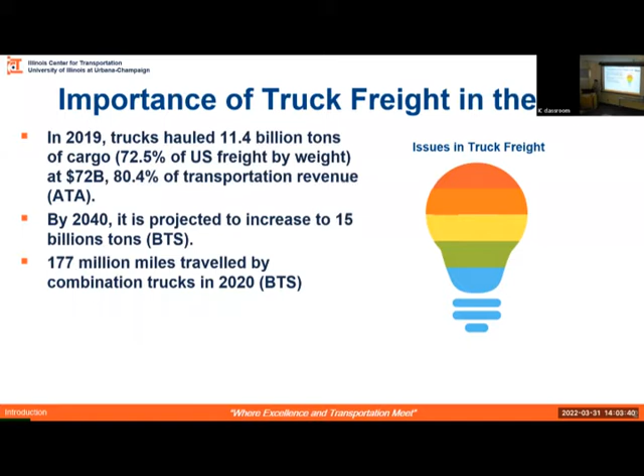Since it is so crucial, even the smallest problems can be huge. The things I want to talk about are these 5 things. First, there is a driver shortage of currently over 60,000 people, and this is expected to get even higher with time.

Second, the cost per ton of freight is really high—approximately 3 times compared to rail. So that's really huge. Third is safety. Trucks make up only 5% of the vehicle population, but they are responsible for 10% of all the fatalities, so that's something we have to work on.

About congestion, in 2019 alone, in a 50 mile segment, there was a congestion cost of $300 million. And finally, the 5% of the vehicle population consumes 24% of the fuel, and we are responsible for almost 1/3 of all emissions in the US. It's something we have to look at.

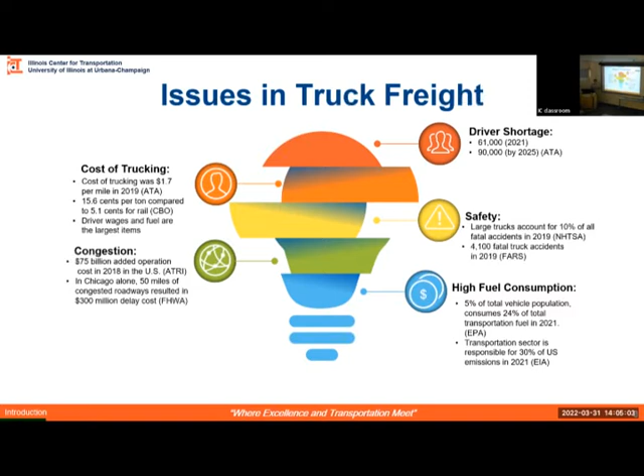At this point, I would like to introduce connected and autonomous platooning. What ends up happening is these trucks follow each other very closely, right behind each other. With that, they save approximately 5 to 15% fuel, because of their control strategies—they can be really close and follow each other right behind the same line.

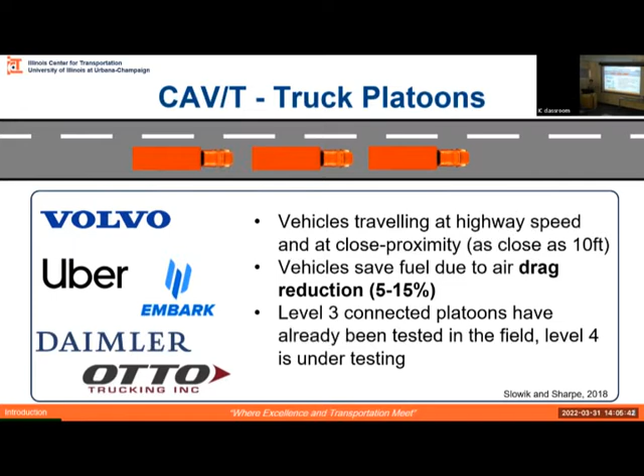The hope is that when we introduce platoons, we are going to reduce some of these problems. First, the driver shortage—you need just one driver per platoon in the first stage, and then you could even take that away. It was calculated this could reduce costs by up to 45%. And because platoons occupy less space on the lane, they increase traffic capacity. We hope they also increase safety, and finally, as mentioned, they save between 5 to 15% fuel. So it's looking good so far.

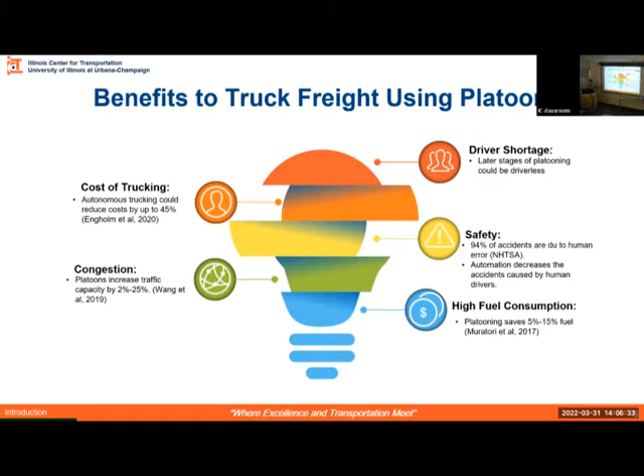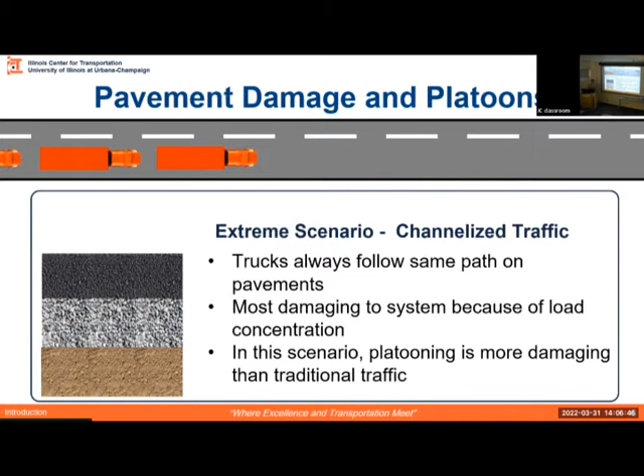But the one thing that we have not talked about is how these platoons are going to interact with our pavements, because that's where they're going to be, right? If you think about it, the reason why they save so much fuel is because they're really good at following each other in the same line.

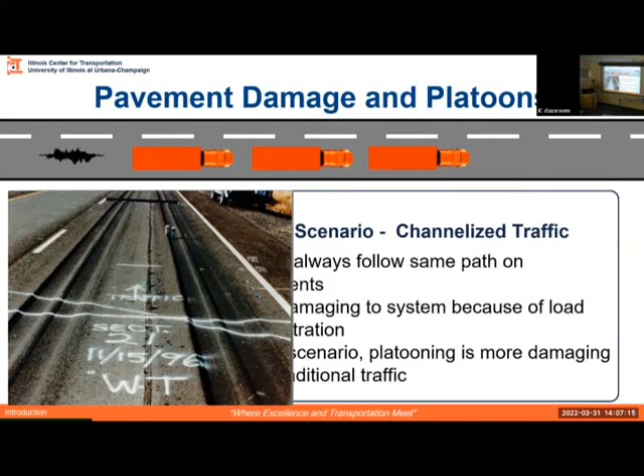And you may think, hey, this is a test section, it's impossible for this to happen in the field. Here's a picture we got from the field. You can see the same thing in small lanes — this is actually a thing.

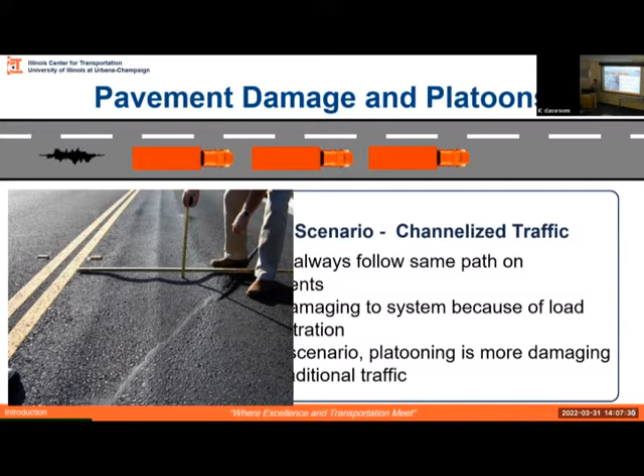So we have to think about how we can solve this problem when we get into platooning. One possible solution is to shift these trucks left and right a bit, so that over time we're not loading the same point. This will both save fuel and hopefully preserve the pavement condition.

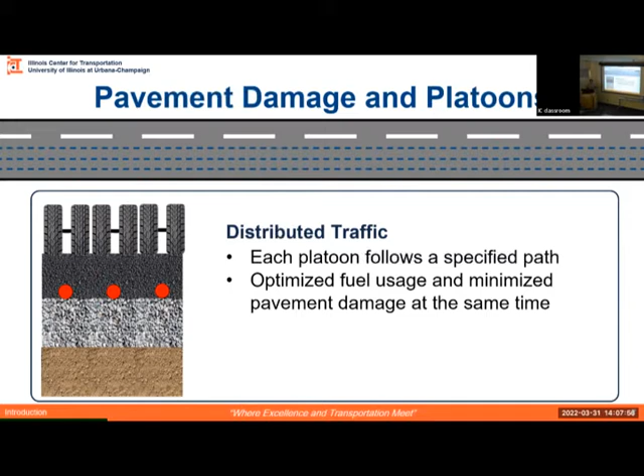So we need a model that can describe this sort of behavior. Here are the four things, the four questions that we're going to talk about today.

To know how platoons interact with the pavement, first we must know where can I platoon to begin with. What percentage, what segments of this highway can I actually do platooning on?

Two, how will this spacing change the responses and how the pavement is responding to the loading? And third, how will this position, where they are in the lane, change our pavement design?

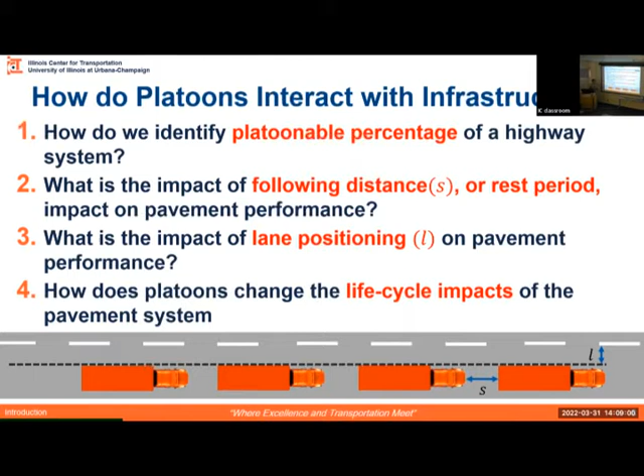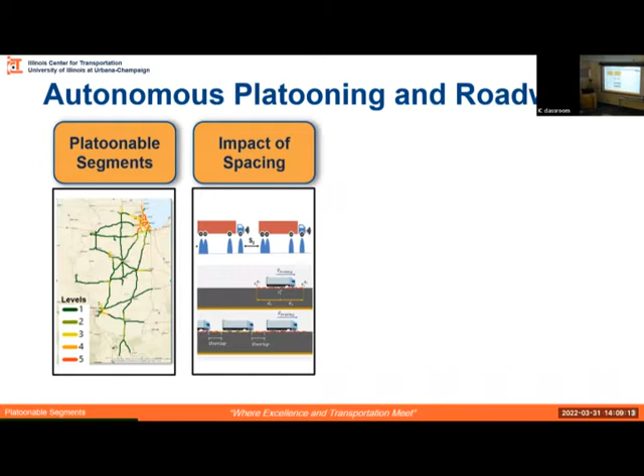And finally, when we look at this in a whole life cycle perspective, is it actually reasonable for us to expect that platooning is good, or should we do something else? So these are the four questions we'll cover in the remaining half hour: platoonable segments, the impact of spacing, the impact of lane position, and finally the life cycle.

Starting with the platoonable segments — when you think about platooning, we have to think about what makes platooning save fuel. The thing is, these trucks need to travel at free flow speed for more than 15 to 20 minutes for this to be feasible.

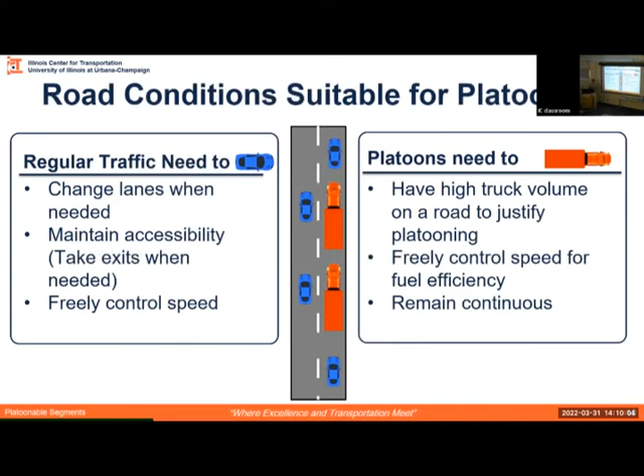If you have a lot of traffic and you have to stop and start, then it's not going to be fuel efficient. But you also have to care about the rest of the traffic, because if you have a very long platoon and you want to take an exit, you don't want to fight with the platoon to take an exit, which can cause a lot of problems.

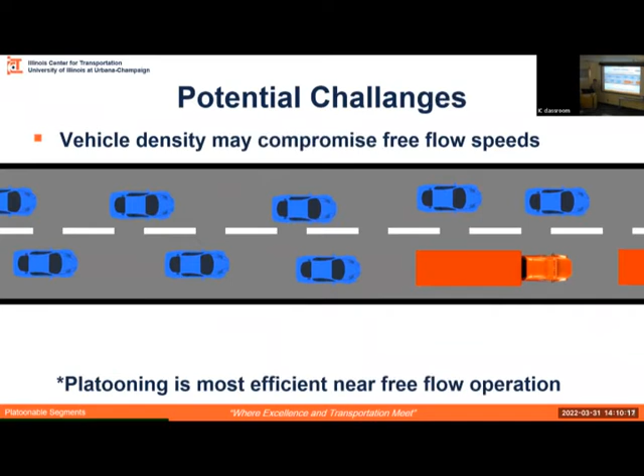So here are the two challenges I just mentioned. The first is vehicle density — if we have very high density, then I don't have control over my speed, so I cannot platoon.

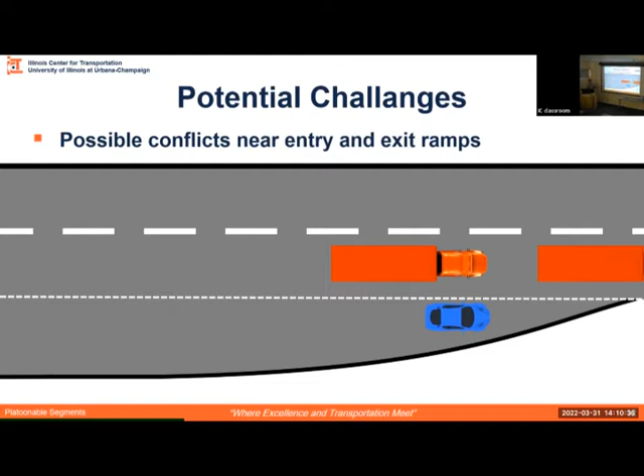Two, we don't want a situation that looks something like this, where a vehicle that wants to come into the roadway or get out of the roadway gets stopped by a platoon. With these two things in mind, we looked at the whole road network of the state.

And for every 20-mile segment, we looked at two things: one, what is the volume over capacity of the roadway, and two, how many possible conflicts will there be within these 20 miles?

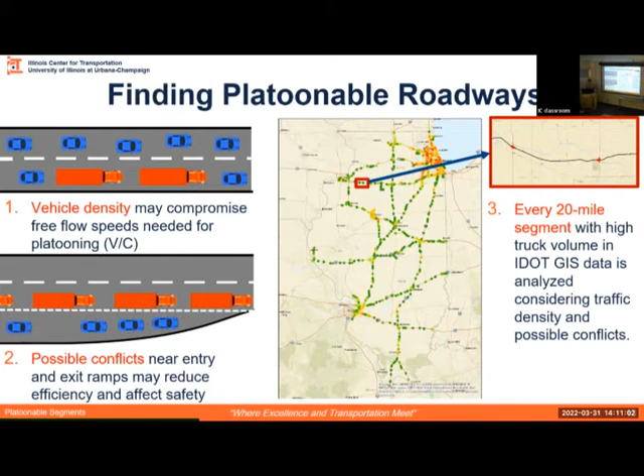Then what we did is say, if it's level of service C or below, where you have control over your speed, then you can platoon. Similarly, if you're expecting less than 4 interactions between vehicles, then you can platoon. If you have higher, then you cannot platoon.

So with this, you can see, for example, with 5 trucks and 65 feet of spacing, the majority of the network is platoonable, except for Chicago, some red zones in Peoria, and a bit in Champaign.

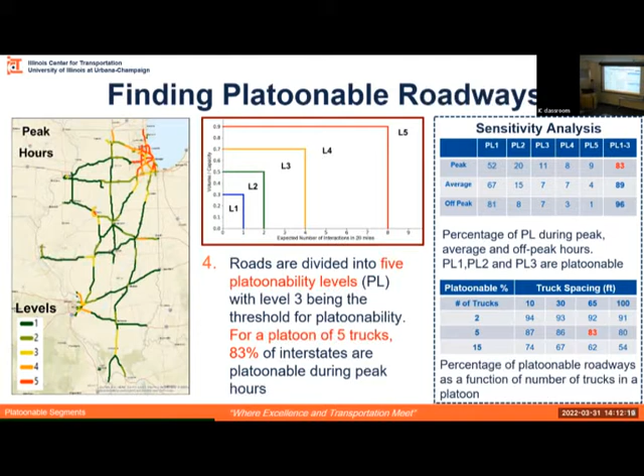If you have only 2 trucks, of course you're going to be disrupting traffic less, so a greater percentage of the roadway will be platoonable. So that was the platoonable segment analysis.

So now that we know what percentage is platoonable, how do we actually change our design of the pavement to interact with the platoons? The first thing we're going to look at is the impact of spacing.

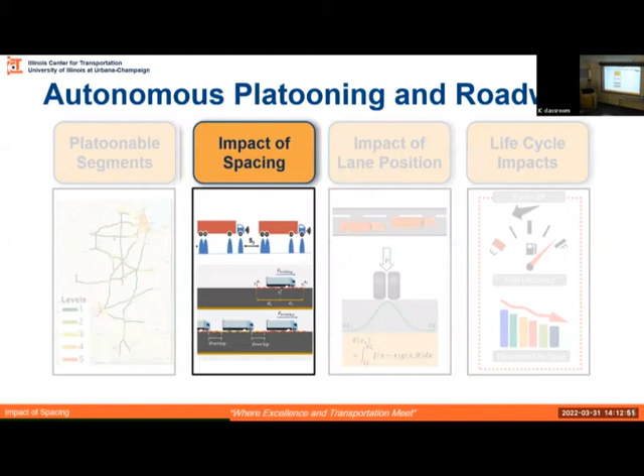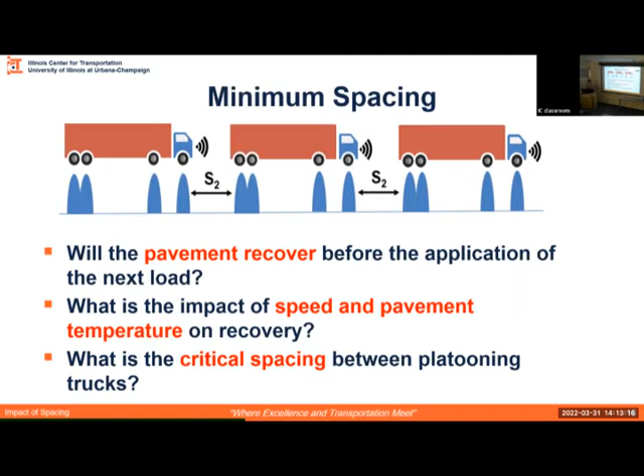Because we're talking about flexible pavements, and it's a viscoelastic material, we care about the time it takes for this material to recover once it's been loaded. The fear is that if we put trucks too closely together, we will load the pavement before it fully recovers, and thus we will have cracking and rutting faster.

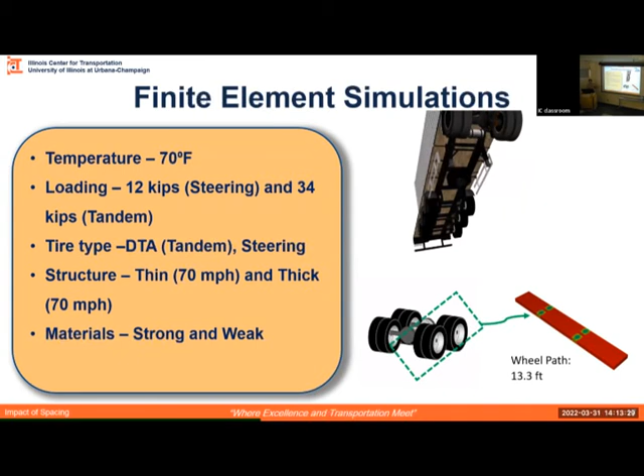So what we did to look at that was run some finite element simulations, and we took these modeled tires and rolled them onto the pavement. Here is a quick video that shows what that looks like over time.

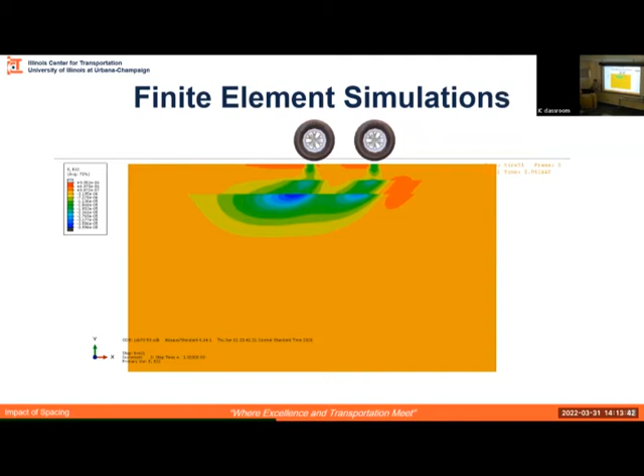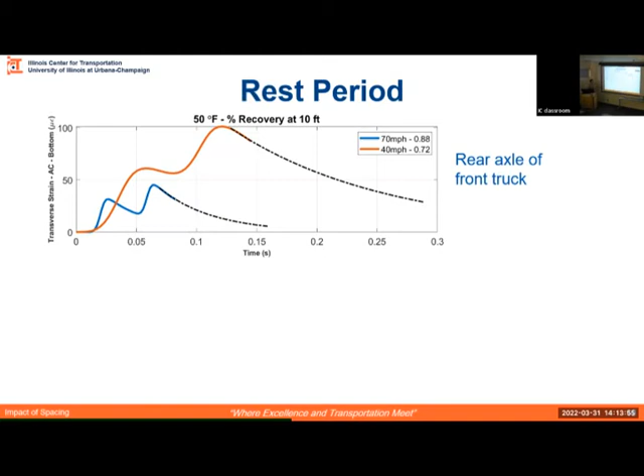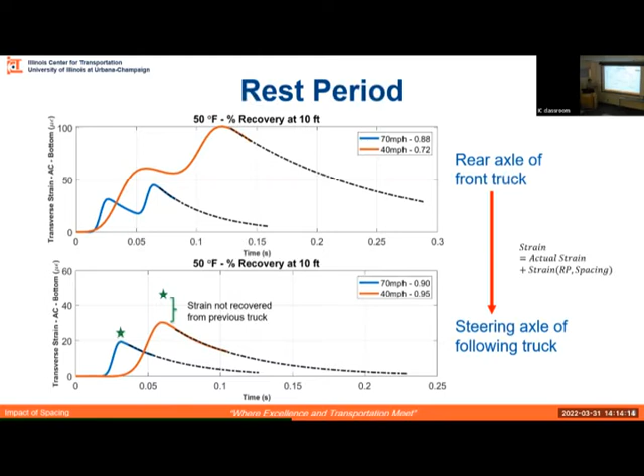So what we want to look at: once the first truck passes, the response, the stresses and the strains, will recover a certain amount. Then if you bring in another load, you will have this loading profile. Depending on where you are on this path, you will potentially increase your responses, and if this happens, it might be the case that you're going to have faster failing of your pavement.

But I have to put a star here, because we have to realize that this is a finite element simulation. And at the end, what we're interested in is the stresses.

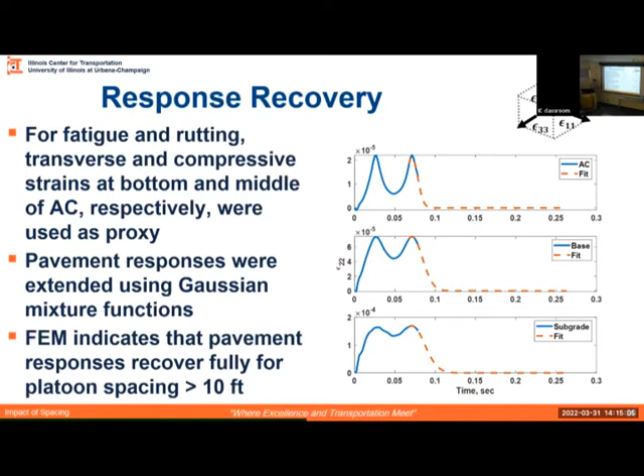So we are currently doing some tests on permanent deformations, and you can see, well this is not a final result, but we saw that as you increase the rest period, you actually increase your permanent deformation, which does not make a lot of sense when you first look at it, but I'm happy to talk about this later.

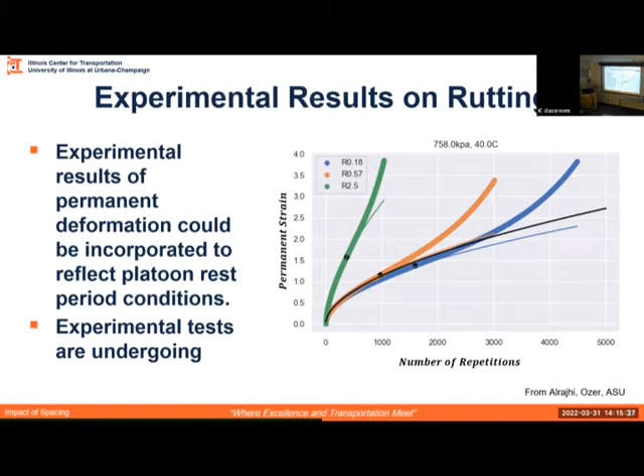Within the scope of what we did for the finite element, we did not see this result, but we're still working on it. So now that we dealt with spacing, and we said it doesn't have an impact according to the finite element simulations, we have to look at the impact of lane position now.

I want to take a quick detour for those who don't know how we design pavements, because I think this will help put things into perspective. The majority of roadways here in the US are flexible, and this is a typical structure: a flexible layer, a base, and a subgrade.

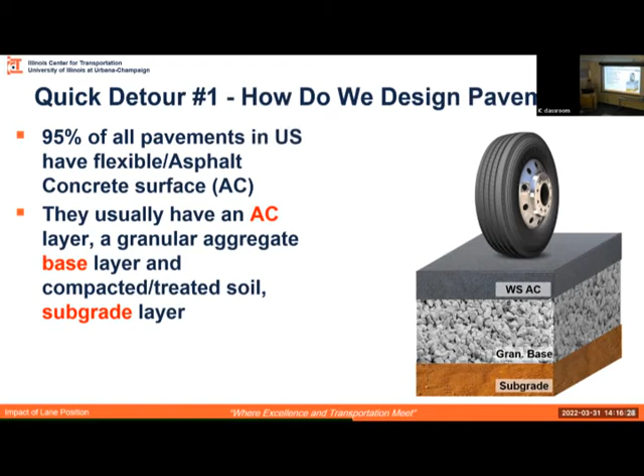So what you may want to do when designing your pavement is think about the most common load you will have. In the US, for example, this can be a class 9 truck. Then you take the most common loading on that truck, and put that into your favorite simulation software. It can be finite element, or something else.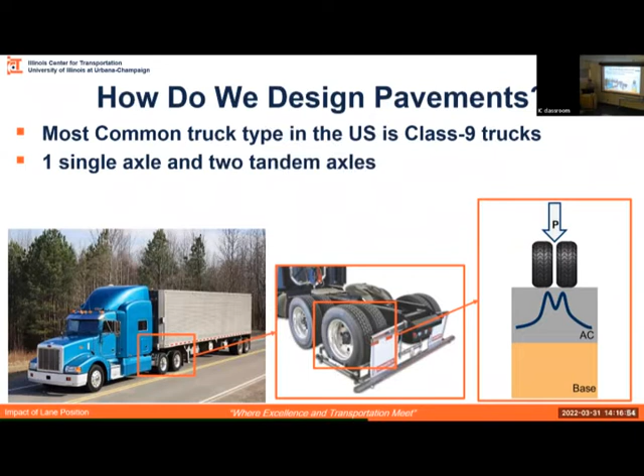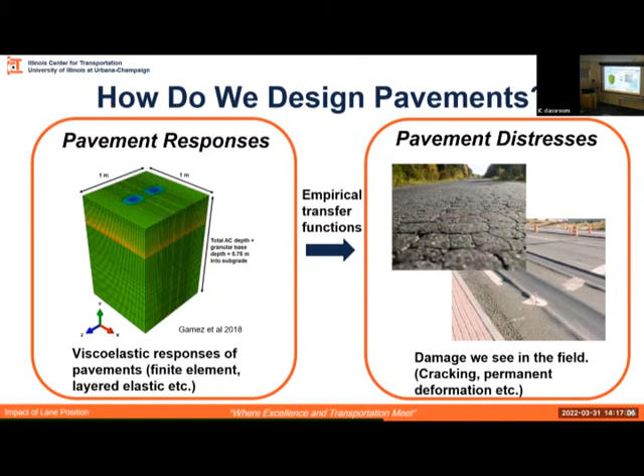Once you have that, you have the responses of the pavement, which are the stresses and the strains. Then you connect those to the distresses we see in the field, which are mainly the load-related ones: cracking and rutting. This whole thing is called the mechanistic empirical pavement design.

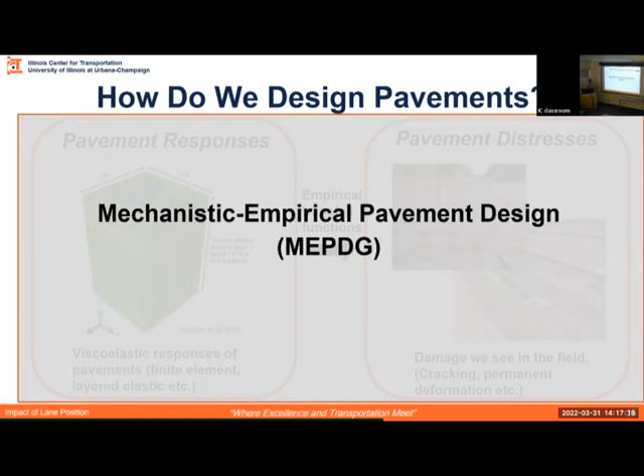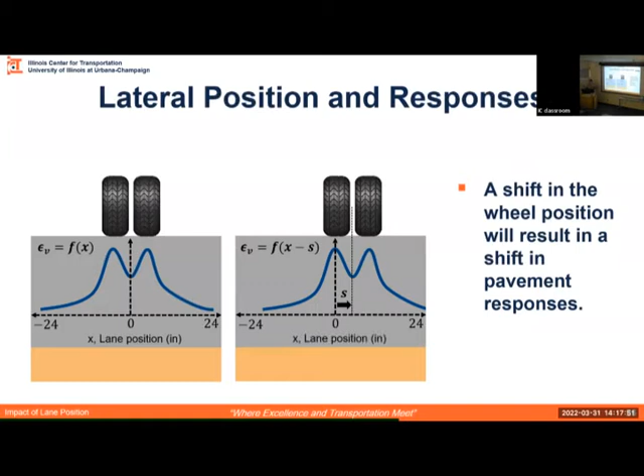So where do we put the impact of spacing in this whole frame? When you think about it, the point where it comes into place is that when you shift the tire, you're also shifting this response. So if you can find a model for this shift, or know how that shift is happening with respect to time, you will have an idea of how this response profile will look like in, say, 10 or 15 years.

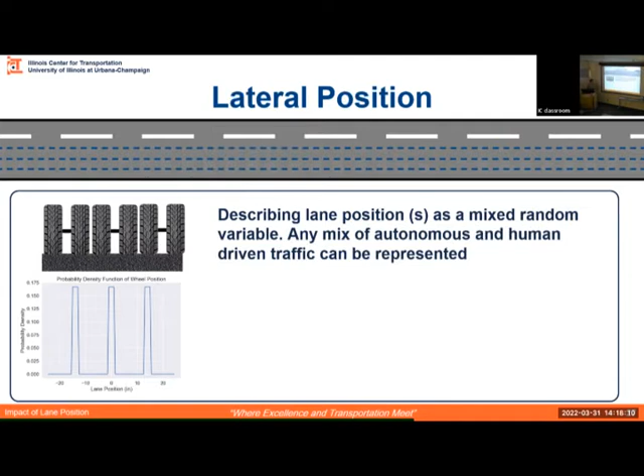So how do we do that? If we have a case like this, where we have trucks that are really good at keeping their position, then we can say they sort of follow a uniform distribution with these three peaks. But then there is you and me, humans, who are on this roadway too, and we follow somewhat a normal distribution, which is what's shown in the literature.

And then what you have to do is put these two together, which will give you, for any mixture of traffic, how the lane position will look like.

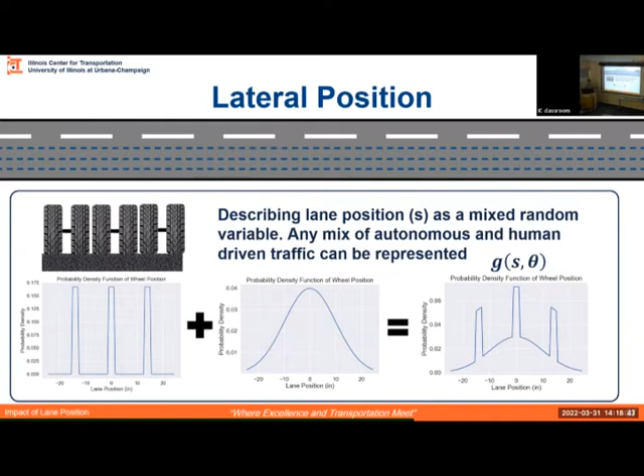And if you want to see the future, let's say 10 or 15 years, you can just compute the mean of this response profile that is subjected to this loading. Now, I know that was a little bit hand-wavy, so let me show you a quick example here.

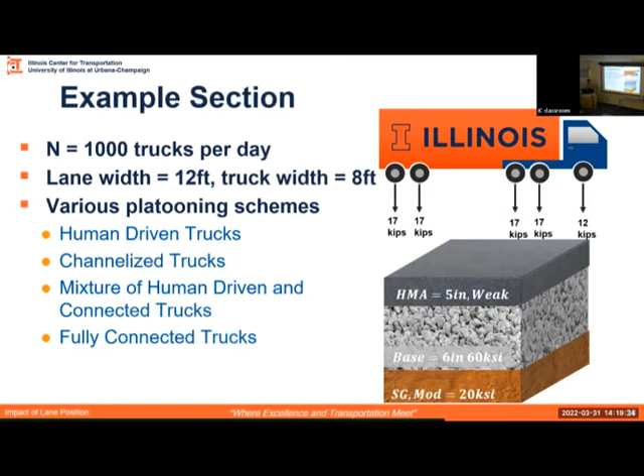So we have a pavement here that is 5 inches with a 6-inch base and a subgrade of 20 KSI. And we're going to load it with this truck loading, 1,000 per day. The 4 traffic schemes we're going to look at are human, channelized, mixed, and fully connected. Here's what that looks like.

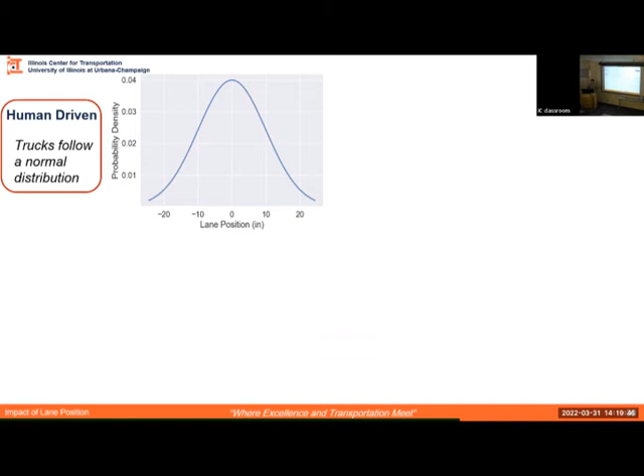Stay with me. This is what the human looks like - we're in the middle, but we're not perfect. This is what the channelized will look like - they're always in the middle. Here's a mix of 40% connectivity, where we put 20% on the left side of the lane and 20% on the right side of the lane. Then 100%, in which we distribute it like this.

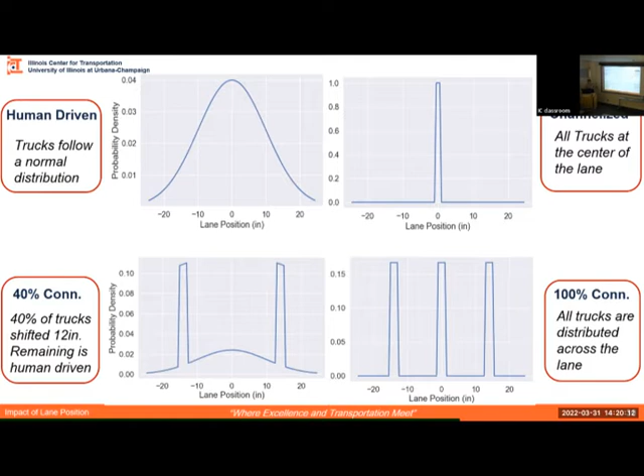So now we want to see what happens in the pavement when we put these loadings on top of it. If we look at the results for a span of 10 years, let's start with permanent deformation. We have a baseline for the human. As you might expect, if I impose a channelized loading, I'm going to have a lot higher rutting. But if I shift some of the traffic to the left and right with a mixed regime, I can reduce this significantly.

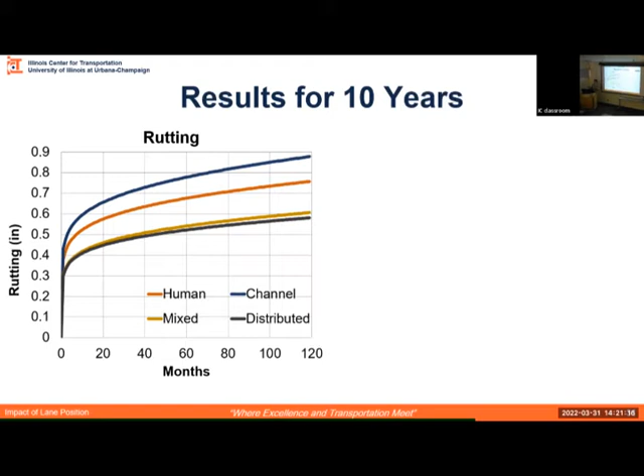Now, I can do some further reduction if I distribute the rest, but we saw in these studies that it's a case of diminishing returns. The first 20-30% that you shift really helps, but the rest, it still helps, but if you can shift that first 20-30%, you get a lot of the returns to begin with.

Same thing with the cracking. We have a baseline for human, which channelized is worse. Mixed is of course better because we shifted it. And then we get a little bit more returns, but again, it's not as much as we had in the previous case.

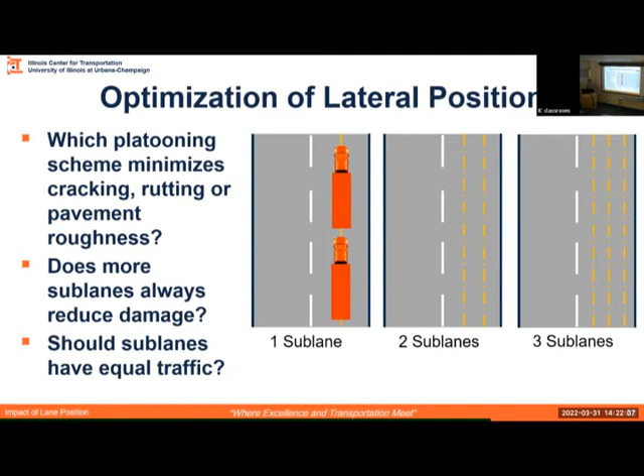So the question you might be thinking about right now is, is there a scheme that will actually make this as low as possible? That was the question we looked at, and we considered a different amount of sublanes, and placed these vehicles at these different locations with a genetic algorithm to see which one will give the lowest pavement damage.

This is an example of a scheme that gives the lowest. But just to put it into perspective, the results of this are incredibly close to the one where we had one on the left, one in the middle, and one on the right. Because think about how wide a truck tire is - shifting this by half an inch is not going to really change your results.

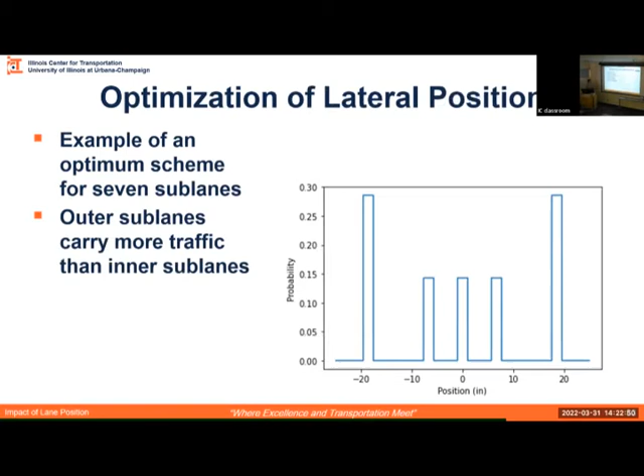You have to shift it by a foot for you to see something that actually makes sense. So that's why you're seeing the impact of these diminishing returns, if that makes sense. So now we have that.

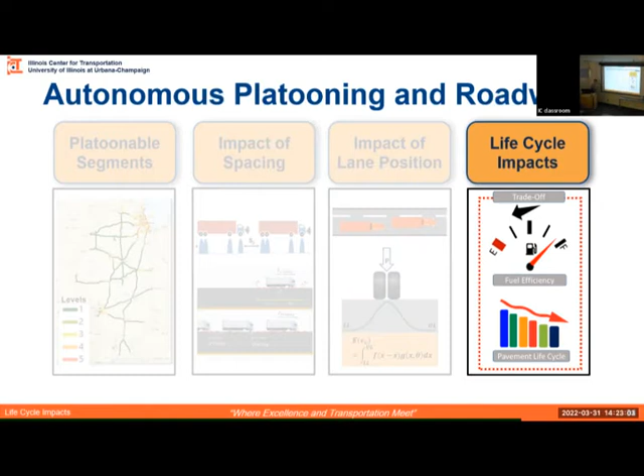Let's finally look at how this all changes the overall life cycle of this pavement. I want to take a quick detour to tell you what we mean by life cycle. When we talk about sustainability in general, we're talking about these 3 pillars. For this project, we only focus on the first 2, but that's not to say the social part isn't important - it's just what we focus on within the scope of this project.

When we talk about the life cycle, we're really talking about the point at which you have the material, your rocks and your binder, and how you're going to get them into the field. How are you going to get them into the plant? All the way up to when you're done, how you're going to reuse or recycle your material.

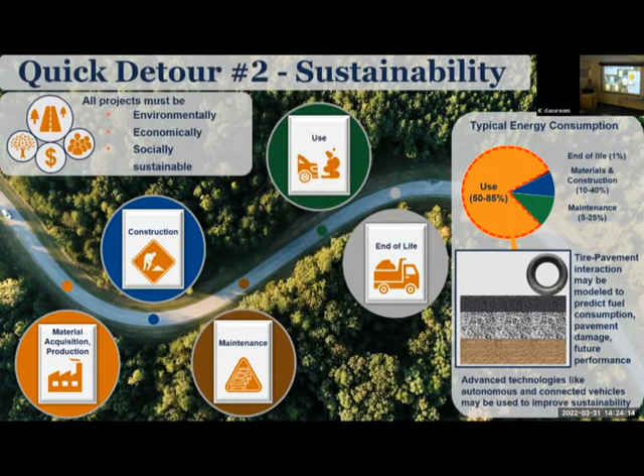So if you look at a typical life of a pavement, you see that the majority comes from the use stage, where vehicles are interacting with the pavement to consume fuel. The rougher your pavement surface is, the more fuel you're going to consume. So that's something we have to keep in mind. With this picture in mind, we did a life cycle assessment and life cycle cost for these 4 pavements.

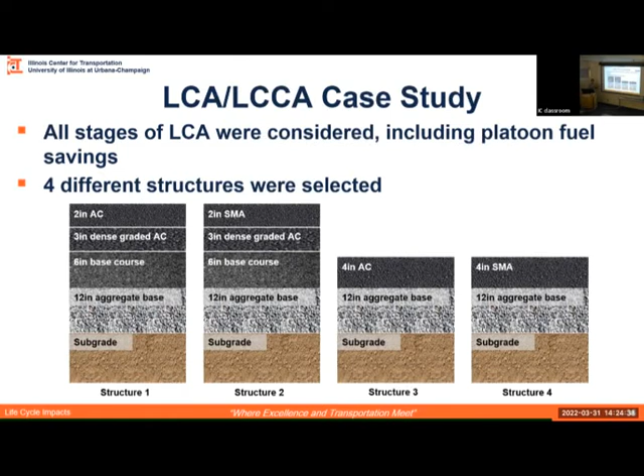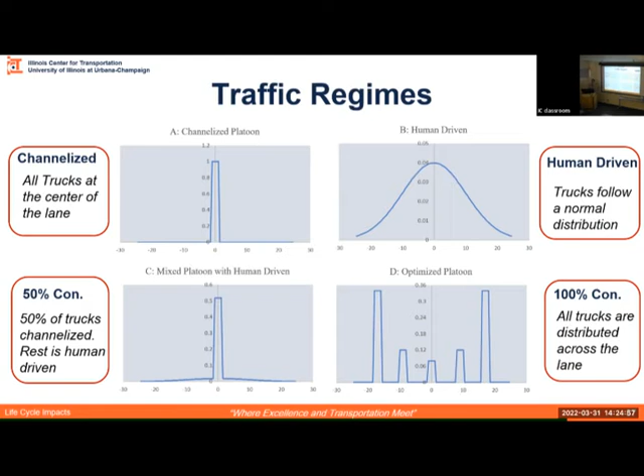For time's sake, I'm just going to show you the results of this one, but it pretty much follows the same thing. Here are the 4 traffic regimes that we're going to compare over a span of 40 years: we have the channelized, the human, a mixture of channelized and human, and one where we distributed the traffic.

So if we look at the life of this over a 40-year life, and assume we do regular maintenance at 10, 20, 30, and 40 years, we can look at the impact of these costs. The agency cost is the cost that goes into building the roadway, and because we're doing maintenance at regular intervals, you'd expect this to be constant. This is just for this scenario, by the way. We have some others, but for time's sake I'm just going to show you these results.

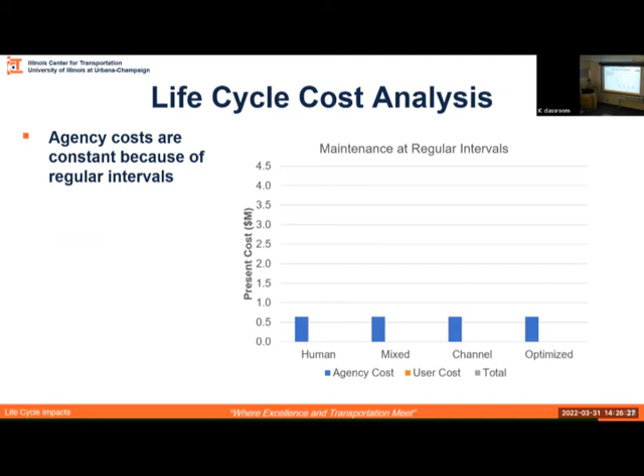Now, what do you think will happen to the user cost when we put that on top of this? As you might expect, we have a benchmark for human. When we platoon, when we are channelized, we are still saving a lot of fuel because we are platooning, and then the mixture is somewhere in the middle. But if you actually distribute the traffic to the left and right, you are saving fuel by platooning, and also because the pavement surface is a lot less rough, you consume less fuel on the same pavement. So it's a really win-win-win situation—you're not losing anything in this scenario. There's no reason why you should have channelized if this has the same savings and then more.

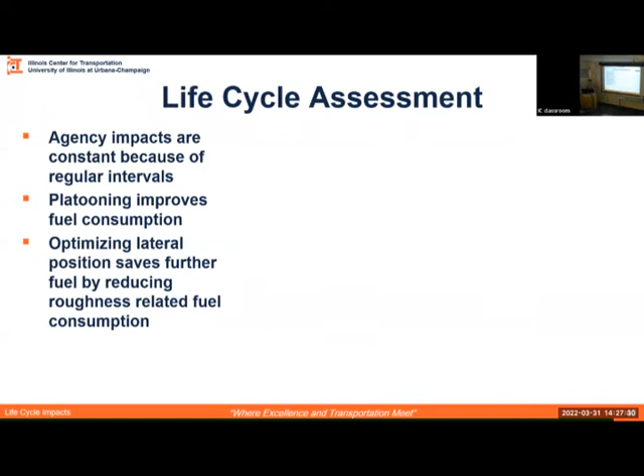So this was the result for cost, and if I put the total of the two, you see the same trend. If we look at the life cycle assessment—how much energy we consume over the lifetime—we see the same thing: constant agency cost for this scenario, and the same trend that channelized is good, but if you push these trucks to the side, we can save even more. So overall, if we work on both pavement damage and fuel savings, we can have a lot more reduction in general.

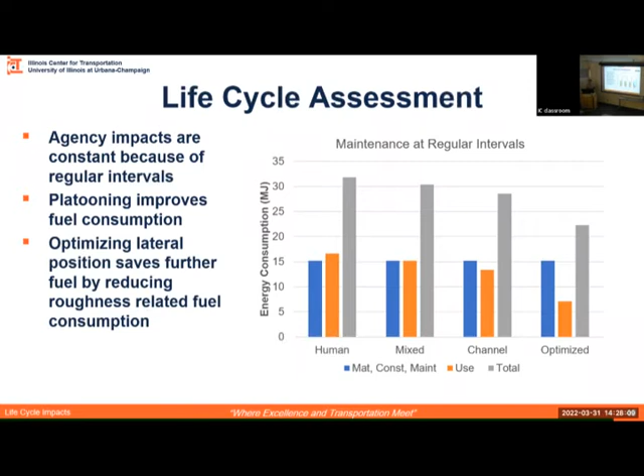For time's sake, I'm just going to focus on these two. In summary, what we showed, hopefully, is that by introducing what seems to be a challenge, we can actually turn this into an opportunity that will improve freight in general. We showed that a roadway's platoonability changes depending on vehicle density and the number of interactions between vehicles. We developed a pavement design framework that can put these things into use and give you the pavement damage for a mixture of these vehicles. And finally, if we have a scheme that works, we can reduce costs and environmental impacts by 46% and 36% respectively, which is a lot when you think about it.

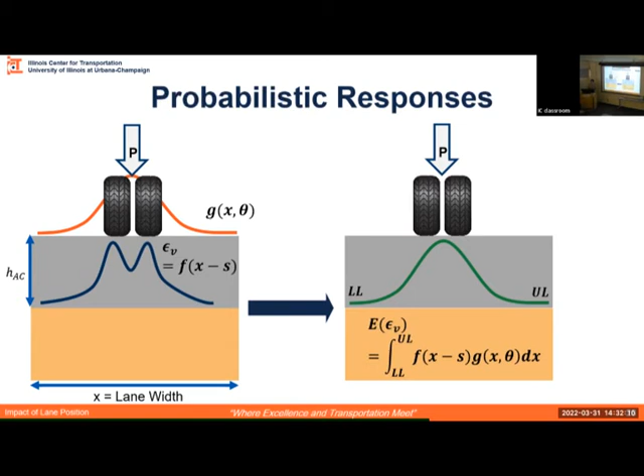Yes, Angeli. Thanks, Egemen, really nice presentation. For slide 31, and also slide 38 for later. I noticed that at the beginning of the months it's quite a steep, fast-rising increase, and also the IRI in the first months, within 10 months. Can you explain why that is so steep? This is a limitation of the rutting progression model.

It is a power model, but it's dependent on the number of repetitions to a power. If you plot it, what happens is you get a lot in the first few months, and then it stabilizes. Is this what's happening in the field? No, but they fit this on the field data, so I'm thinking it's representative, but this is a limitation, as we have listed, of using these transfer functions on this framework.

Yeah, so I understand, but would it affect when it gets stable? So it doesn't matter how you get there. Let's say at the 25th year when it's stable, does it, if that was corrected, would that progression at a given year be impacted, or is it only that initial issue getting to that stability? So there is no stability per se. If you give this enough time, it will keep on going because it's a power model, so it never reaches a constant. So I don't, by stability, do you mean where it turns from the primary to secondary?

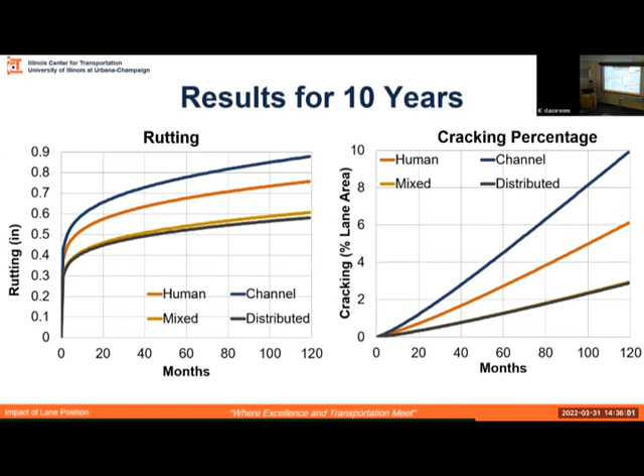Okay, and then on slide 38 for IRI, it's also steep, is that also... The transfer function for this is a function of rutting, so it follows a similar trend. If I may, the IRI is calculated from the fatigue and rutting equations, so that's why it's reflected here too. Thank you.

Sorry, I just have a very basic question. How is truck platooning better than railroad freight?

I don't think we compared the two. Are you asking if we should do more rail instead? The first thing is that platooning is quite new, and we have to deal with autonomous trucks and pavement stresses—these are the main things. While freight rail is already set up, why would someone select this rather than the setup we already have? That's the question I have.

That is a great question, way out of my expertise. You want to know why we don't do more rail, right? I watched a video yesterday, I think Marques Brownlee posted it, about electric vehicle projects like Faraday—they all seem very bright, but then they don't get investment or funding, and they just go down. So how do you think this project will scale over time?

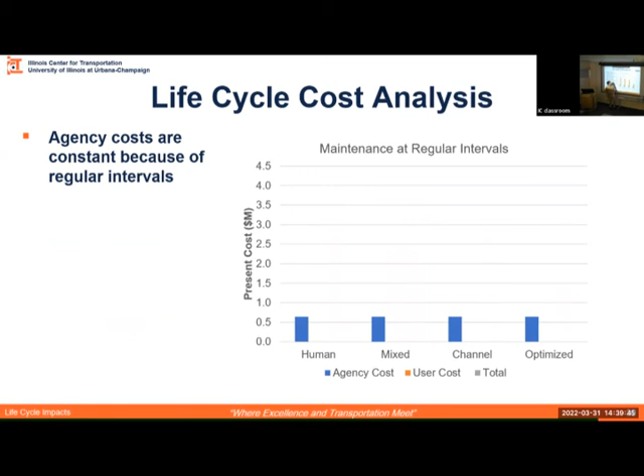To answer that, let's look at the channelized and optimized cases where we have 100% penetration—those two are comparable. If we look at pavement condition, this one has lower pavement roughness, so we're consuming less fuel because the pavement is less rough. This comes from models we developed previously connecting pavement roughness to fuel consumption. So your optimizer puts that even well below the human benchmark, right?

Yes, the human is our benchmark, but yes, we can lower it further with the platoon. What ends up happening is we channelize, and even though it has higher pavement damage, it still has better user cost because of fuel savings—though they're still consuming more fuel from the pavement roughness point of view.

But then we move into the case where it's the best of both—less fuel consumption from the pavement and less from the platoon. So it may help to bring those aspects that contribute to this final result to show how they relate to or affect each other. Okay, yes, thank you.

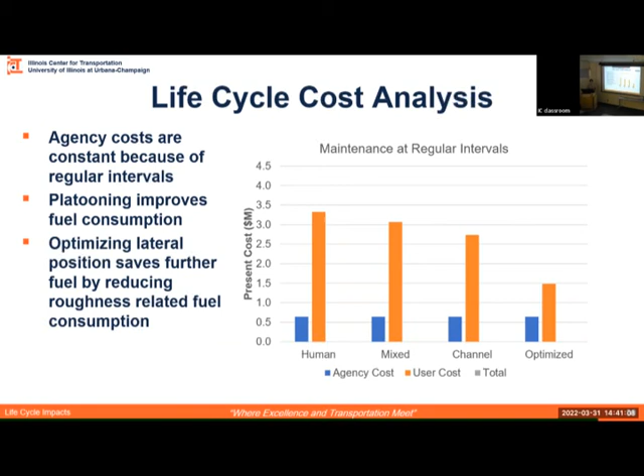I have two small questions, if that's okay. Can you go to the IRI progression curve? Don't you think it's a little strange that after 40 years, the maximum roughness is only 100 inches per mile?

No, and the reason I'm saying no is let me explain how this is calculated. This is a function of pavement rutting, fatigue, and conditions due to thermal loading. Because there's no difference in thermal loading between platooning and non-platooning cases, we assume it's the same, so whatever contribution comes from thermal is subtracted. This would be higher if we included thermal, but we didn't want to put thermal where it doesn't belong—we just wanted to compare fairly.

My other question is related to the first task, where you decided which sections are platoonable and which are not.

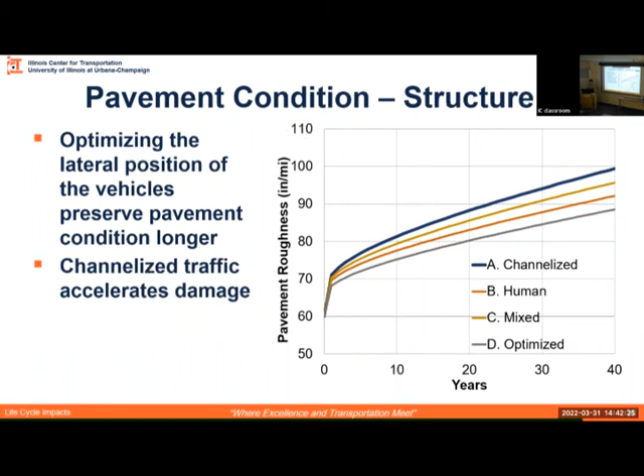So I noticed that in that map you showed, there would be very long platoonable sections, but then a small dot that is not platoonable. I was thinking that maybe at these locations the platoon would have to split up, the trucks would have to split up. But then you would lose the savings, you cannot do this with only one driver. So this advantage of only needing one driver is not going to be possible. You would still need 5 drivers for the 5 trucks to split up and come back together. Do you have any ideas of how to make those small segments platoonable?

I think that's a good question. With regards to your first point about having one driver, there have been some tests that show you can do it with only one driver, even with a spacing of 250 feet, where vehicles come in and out and the trucks are still able to follow. So it is technically possible that you can break the platoon with only one driver and then still bring it together, from the things that I've read.

But your point is well taken, that if I want to go from here to here, I really need to think about whether there's something I can do to make this platoonable. The simplest thing would be to wait until after 5 p.m., for example, to do it at a time when you can platoon, and calculate how much fuel savings you're losing by not platooning here during peak hour compared to your loss of time, which gives you another proxy. But I don't have a concrete answer for what we can do to make this platoonable at this point.